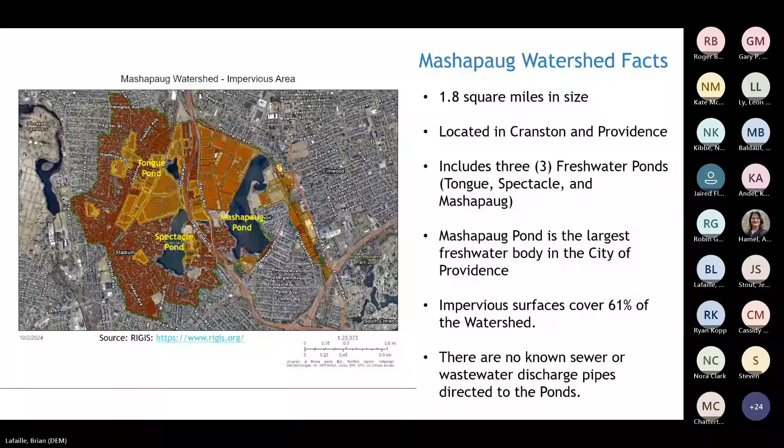So some examples of impervious cover and sort of how it looks within this actual watershed. Here's some photos. We got a Google Map view, aerial view of Mashapaug Pond with Spectacle Pond in the distance in the upper left-hand corner.

You can see there's pretty large commercial properties within the watershed, very large rooftop areas, which are also considered impervious cover, lots of pavement, lots of sidewalks, lots of concrete. And in some cases, we have concrete or pavement going right up to the shore of the ponds. In the lower left-hand corner, you can see asphalt or pavement is running right up to the shoreline.

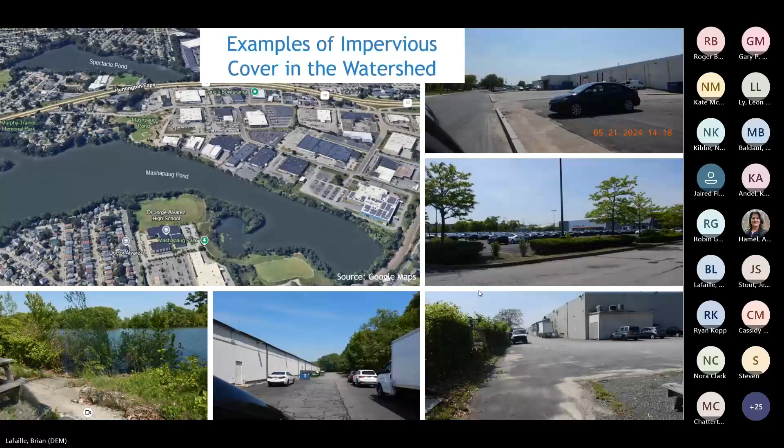So let's talk about why impervious cover is such an issue for water quality, why that over 10% number is a problem. Well, as you can imagine, when we have an area such as the Mashapaug Watershed that has so much pavement and impervious cover, when rainwater lands on those surfaces, that water runs off and becomes stormwater. That water is not just being discharged into our waterways through catch basins and other point sources, but it's also capturing a lot of pollutants as it moves along the ground surface.

The slide that you're seeing in front of you sort of has an overview of the typical stormwater pollutants that can be found in stormwater and their sources. Examples are nutrients such as phosphorus and nitrogen, which come from man-made fertilizers, also animal waste that's in the environment, organic matter from leaf litter. Bacteria can be picked up in stormwater and discharged from animal waste, human waste, organic matter.

And we also have some industrial pollutants such as metals, sediment, oil, and grease that comes from industrial activities, vehicles, rooftops, parking lots, etc. And lastly, the sixth example here is chlorides. Chlorides are applied in the form of road salt and sand during the winter months, and those can be washed off into our water bodies as well.

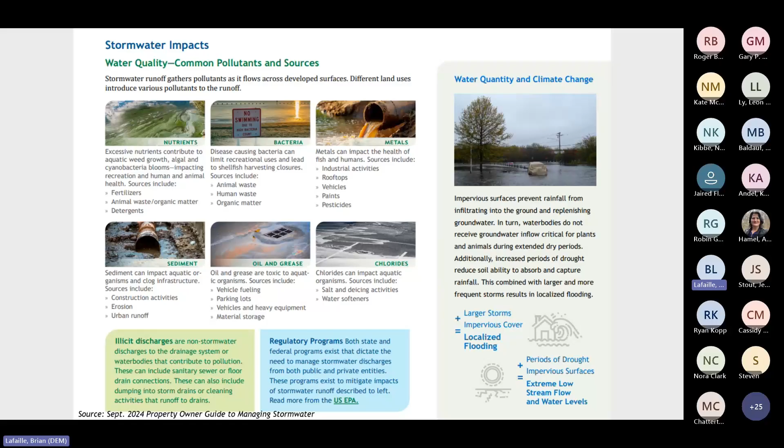So how do we address these pollutant impacts associated with stormwater and impervious cover? Well, the Clean Water Act, which has been around for a little over 50 years now, we celebrated the 50th year anniversary of the Clean Water Act a couple of years ago. That sets up a framework for a water quality-based approach. So DEM is charged with applying this Clean Water Act framework, and we do that through lots of different staff here in the Office of Water Resources.

The first thing we do is we monitor and assess our surface waters. If they're impaired or threatened or not meeting water quality standards, we list them as such. And if there are impairments, we look at figuring out what is causing the impairment and how can we reduce that impairment by reducing the pollutant loads going into these water bodies. We do that through developing what's called the total maximum daily load, or TMDL, and we'll get into that a little bit more in the next slide or two.

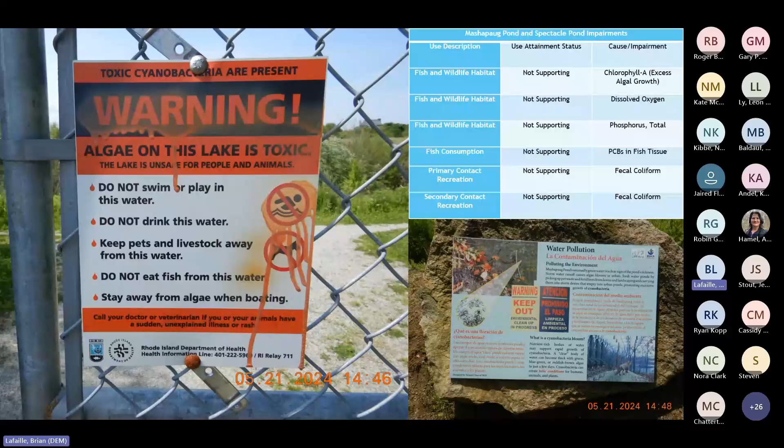So how do we turn this ship around? What is the process for making improvements in the watershed? As I mentioned earlier, we have a process for calculating the maximum amount of a pollutant that the water body can receive in order to meet water quality standards. And that's through the TMDL process. The TMDL also sets limits on how much we can allow into a water body and what maybe needs to be reduced to help that water body achieve the standards that we set out to achieve.

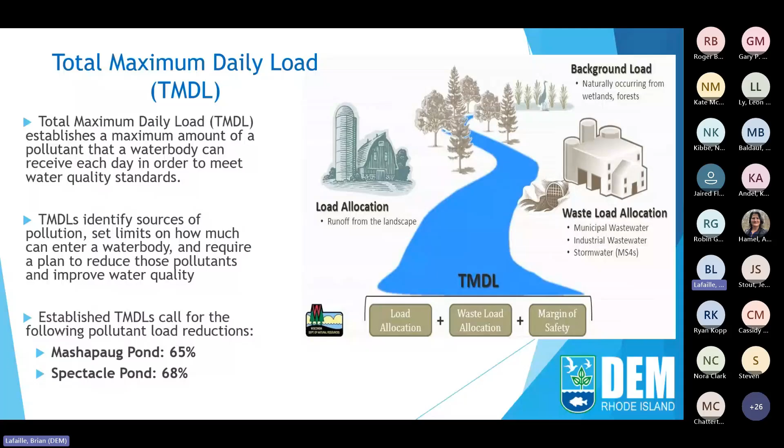Within the watershed, we have established TMDLs currently. For Mashapaug Pond, those TMDLs are asking for a 65% reduction in the pollutant loads in order to bring the water body back into compliance. And for Spectacle Pond, that number is 68% reduction. Okay, so now we've assessed our water bodies, we figured out what reductions we need. How do we control and manage those reductions? Well, we do that through another element of the Clean Water Act, which is a RIPDES permit.

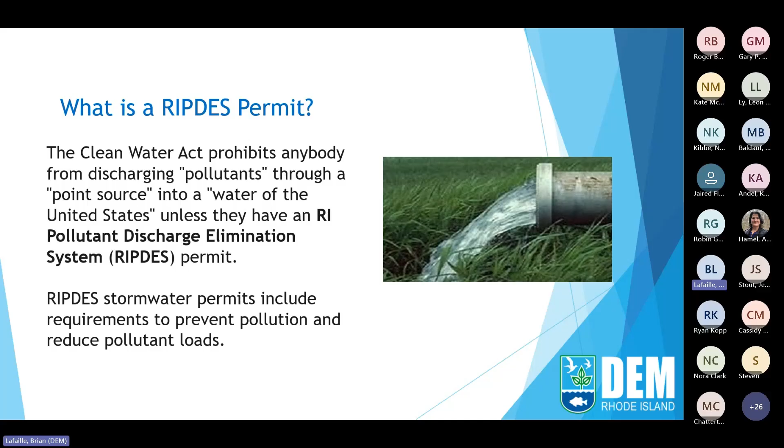So the Clean Water Act prohibits anybody from discharging pollutants through a point source to a water of the United States unless they have a Rhode Island Pollutant Discharge Elimination System permit, otherwise known as a RIPDES permit. Now, RIPDES permits are not just a piece of paper that says you can discharge these pollutants. They're documents that require you to comply with certain requirements to prevent pollution and reduce pollutant loads. Currently, we have 3 different RIPDES Stormwater General Permits in effect in our state. These same types of permits are in effect throughout the nation, so we're not alone in this implementation.

The first permit is our MS4 permit, which stands for Municipal Separate Storm Sewer System General Permit. This permit applies to 34 cities and towns within the state, and it's basically regulating the discharge from the stormwater collection systems in our streets and our roadways. We also have 8 other MS4s that are not cities and towns, but act similarly, such as the Rhode Island Department of Transportation, QDC, Department of Administration, Pastore Complex, among others.

Our second general permit that exists today is our multi-sector industrial stormwater permit. This permit applies to certain industrial sectors, not all industry. Currently, we have 161 sites permitted statewide under this general permit. The last of our 3 existing stormwater general permits is our construction general permit, which applies to construction activity. Basically, if you're disturbing land, we want you to control the discharge of sediment from those sites while they're under construction. And we have approximately 600 sites permitted statewide under that permit.

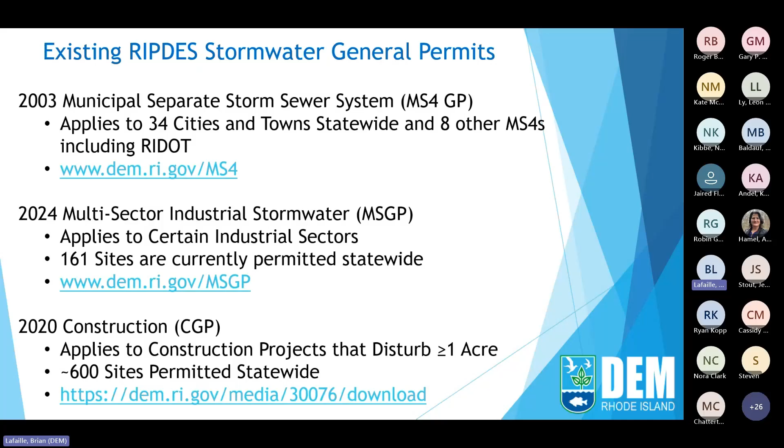Under the Clean Water Act, there is a provision called Residual Designation Authority. This provision allows the DEM to require additional stormwater permits for sources that are not already regulated when we know that stormwater discharges are violating water quality standards, significantly contributing pollutants to surface waters, or are linked to pollutant reductions needed in TMDLs. DEM or a comparable state agency can invoke this authority, or this authority can be requested by petition.

And the reason why we drafted a permit and we're talking about it today is because we received a few different petitions over the last several years. The first petition that we received to invoke this RDA authority within the Mashapaug Watershed was from the Conservation Law Foundation in 2018. And more recently, we received a renewed petition from the Rhode Island Attorney General's office in January of 2024.

The 2024 petition asked us to focus on several main elements in invoking this RDA authority. The petition asked the DEM to close the stormwater permitting gap by addressing the unregulated point source discharges in the Mashapaug Watershed from properties with over 1 acre of impervious cover. It also asked us to address the legacy pollution and water body impairments, which are well known. The petition included a request to promote green infrastructure to reduce flooding and the adverse impacts of more frequent intense storms.

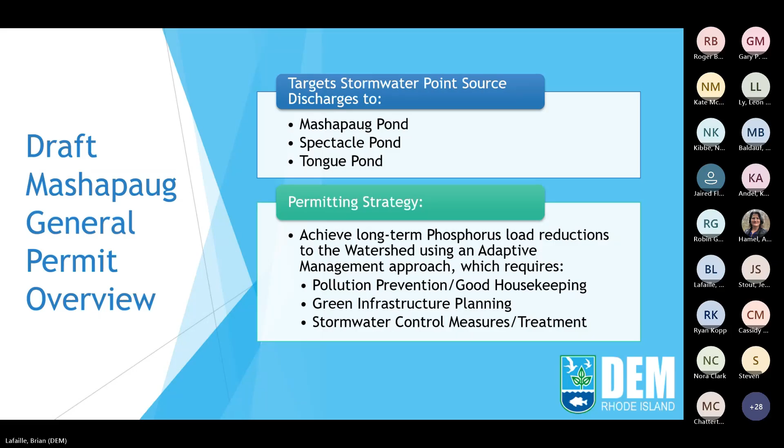Thanks, Brian. I'm going to be presenting an overview of the draft Mashapaug General Permit. As Brian mentioned, this permit is targeting point source discharges of stormwater going to the Mashapaug Pond, Spectacle Pond, Tongue Pond, and any associated wetlands or unnamed streams in that watershed. Our strategy with this permit is to achieve long-term phosphorus load reductions to the watershed using an adaptive management approach. And we'll be requiring levels of pollution prevention, good housekeeping, green infrastructure planning, stormwater control measures, and/or treatment. Next slide, please.

So what do I mean by adaptive management? Adaptive management is a long-term flexible approach that allows for adjustments over time. It focuses on continuous improvement. So you have to remember that it took a long time for the water bodies in this watershed to become polluted, and it's going to take a long time for them to get cleaned up again to the levels that we want to see. So the adaptive management approach allows us to roll out requirements in a phased manner. So that means we're rolling out stormwater requirements in steps, not all at once. And this will allow property owners to make incremental improvements over time. And it also allows us to prioritize sites with the most impervious cover first in this first permit term. You can go ahead to the next slide, please. Thank you.

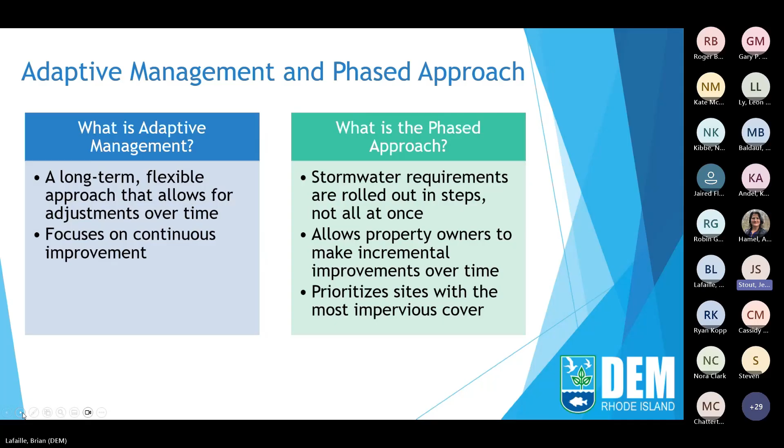So this image here is an image from our GIS map, which is available on our website that's shown on the slide. Also on this website, if you haven't viewed it already, there's a lot of information that we're talking about today. There's this interactive GIS map that I just mentioned. There's also a copy of the draft permit, all the appendices that go with the draft permit, and the draft regulatory fact sheet that goes with the permit. So if you haven't checked it out, you can view it on this website. Getting back to the interactive GIS map, that is something that the public can look at. It's open to everybody who visits our website. You can click on any of these parcels and find out who the property owner is, the total area of the parcel, and the amount of impervious cover associated with that parcel.

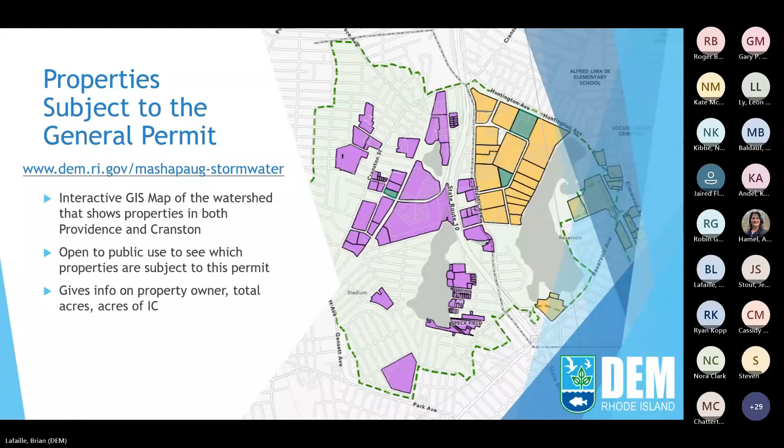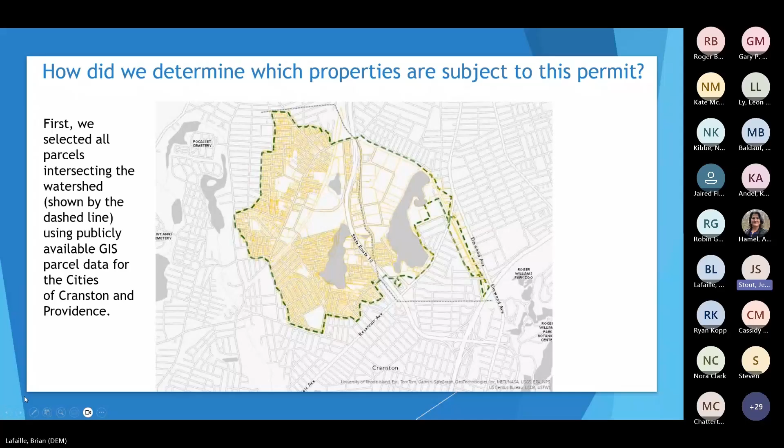Then we looked at all the parcels and who owned them, and we figured out if there were multiple parcels that were contiguous or adjacent to each other that were owned by the same person. We merged them together into one parcel for the purposes of permitting in this watershed. Then we calculated the amount of impervious cover for each parcel, whether it was merged or unmerged, and we selected all of the parcels that had at least 1 acre or more of impervious cover.

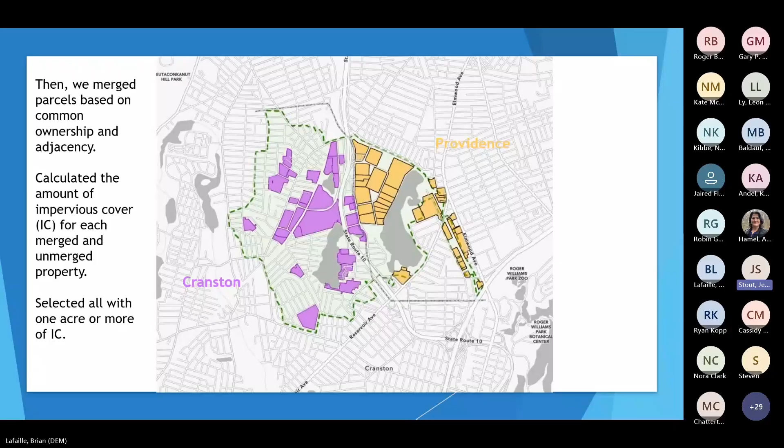Uh-oh, we're stuck. Okay.

Thank you. So the same properties that are in that map are also listed here on this table. We've got about 64 properties total, 3 of which are subject to the multi-sector general permit for industrial stormwater. So they are exempt from the Mashapaug General Permit because we don't need to regulate those parcels twice.

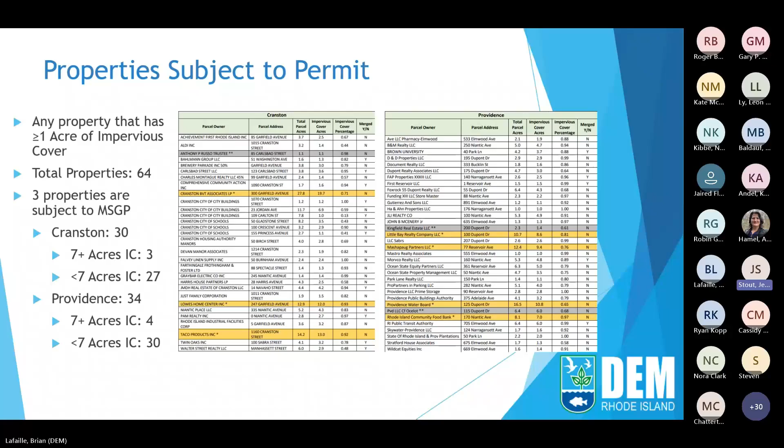I also want to point out that this table can be found on our website. There's an Excel version of this table on our website right underneath, I think, the interactive GIS map. And then it's also at the end of the regulatory fact sheet that is also available on the website. Next slide, please.

So I'm going to talk now about the requirements, the permit conditions for all properties. So all the properties that have 1 acre or more of impervious cover. So for all the properties, we're going to ask that you minimize exposure of pollutants to stormwater. So that might mean that if you have any materials that you store outside, that you cover them or bring them indoors. It means making sure that if you've got a dumpster, it's covered, and that where it's located isn't somewhere where the leachate is able to go directly into a catch basin.

We're asking that you might want to minimize the salt, sand, and de-icers that are used on your property during the winter months, limit the amount of fertilizer and pesticide use, make sure that you're cleaning up your organic waste appropriately, etc. So those are different strategies and ways to minimize the exposure of the pollutants to stormwater and precipitation.

Next, we're going to be asking for a good housekeeping program to be implemented. That will, at a minimum, consist of catch basin cleaning, if you have any catch basins on your site, and street sweeping for any paved surfaces on your site twice a year. We're asking that those things happen in mid-November to mid-December, which is after leaf fall, so that you can collect the leaf litter that's fallen. Studies have shown that leaf litter contributes to nutrient loads, which, as Brian already mentioned, can cause toxic algal blooms.

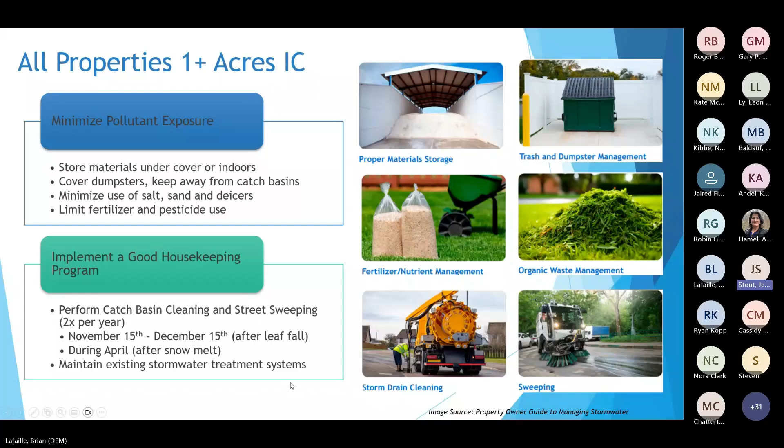We'll also be asking all the property owners to try to minimize the impacts from major storm events. So as Brian mentioned, we've certainly seen our share of increased storm events, more intense storm events, and we all kind of just need to be a little bit more prepared for those things. So especially if you're near a water body and you're near a flood level, we would suggest that you try to store any outside materials above flood levels, or if you know a storm is coming, maybe temporarily move them indoors so that they're not subject to the storm or to flooding if possible.

And there's a couple other strategies that are in the permit, but just taking a look at your site and trying to find ways to make it a little bit more resilient to the impact of major storm events.

We're also asking for properties to have a spill prevention, control, and response plan, and make sure that you have staff that are trained to use things like that, so that you can quickly clean up a spill should it happen. Try to prevent it from reaching a water body or into a catch basin. We want to try to clean that up as soon as possible, and then also having plans and procedures in place to notify the proper authorities should there be a spill at your site.

We're also asking property owners to implement erosion and sediment control practices, making sure that you stabilize any exposed erodible soils, or if you've got sediments that are moving across your site, try to contain them, prevent them from moving into catch basins, prevent them from going into the water bodies using erosion and sediment control practices. Next slide, please.

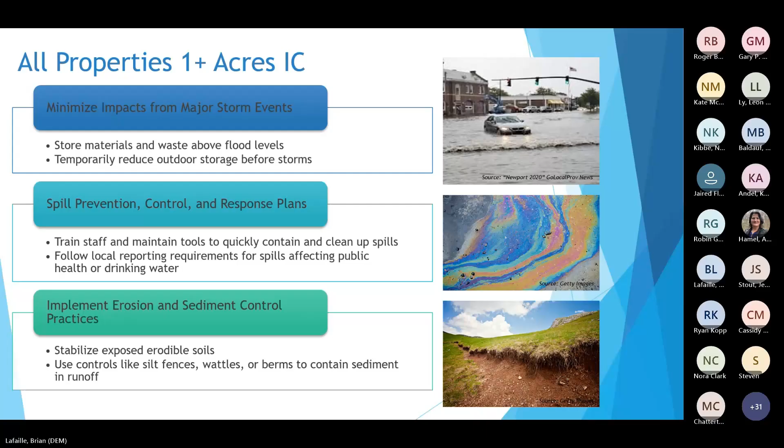So now I'm going to move on to the additional requirements that only affect the properties that have 7 or more acres of impervious cover. Okay, so one of the things that the parcels that have the most amount of impervious cover are going to be required to do is to develop a written stormwater management plan, or what we call a SWMP. What is a stormwater management plan? It's a site-specific document that identifies pollution sources and outlines how stormwater will be managed on the property to protect water quality.

So what should be included in a SWMP? Basically, there's a few things. First thing is you want to identify and name a pollution prevention team. So it's anybody who's associated with your site who is going to be responsible for implementing the stormwater control measures, whether it's catch basin cleaning, sweeping, making sure that these things get done. So you want to make sure that your SWMP actually names those people.

The next thing we're asking for is a site description and a map that's showing the land use of your property, any drainage patterns, impervious areas, stormwater features that are existing on your site, whether that's a catch basin or a pipe or an outlet, outfall, or maybe it's an actual stormwater control unit, whether it's underground or above ground, whatever it is, put it on the map, put it in the SWMP.

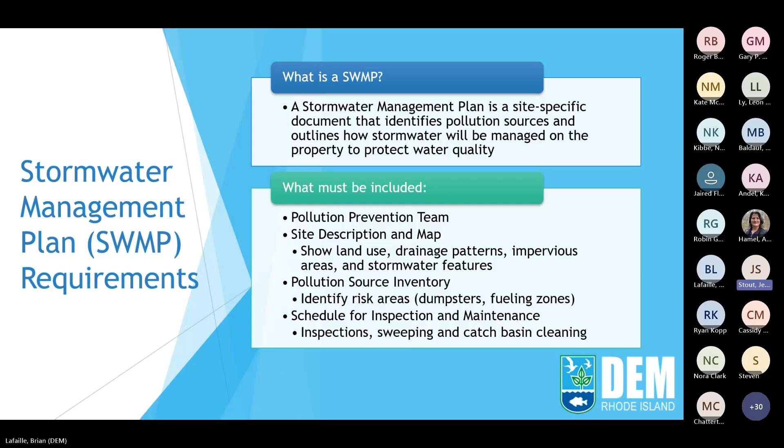Thank you. So I pointed out that we are focusing on phosphorus in this permit. And why are we focusing on phosphorus reduction? Well, one, as Brian pointed out already, phosphorus is a key pollutant in this watershed. It leads to excess algal growth, low dissolved oxygen, harms aquatic life, and obviously it limits the use of the ponds recreationally.

But it's also been shown to be an indicator parameter. We can use it to establish load reduction targets and treatment credits, but it's also understood that if you're reducing the amount of phosphorus going into the water bodies, you will also be reducing other pollutants such as fecal coliform, suspended solids, organic matter. Generally speaking, it's sort of acting like that indicator.

We've got the TMDL documents that have already established phosphorus load reduction targets. As Brian mentioned earlier, Mashapaug Pond reduction is 65%, Spectacle Pond is 68%, and Tongue Pond, though it's actually unassessed at the moment and doesn't have its own individual TMDL, it feeds into Spectacle Pond, so we applied the same pollution reduction for Tongue Pond at 68%.

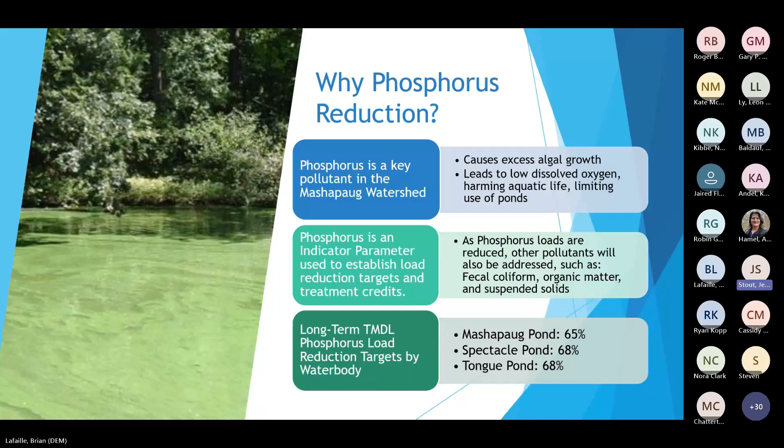So next, I'm going to talk about the other things. So how do we make sure that we're reducing the phosphorus to the adequate amount? Another thing that the 7+ acre impervious cover sites are going to be required to do is develop a written stormwater control plan, or an SCP. What's a stormwater control plan? It's a written document that explains how the property will meet its phosphorus pollutant load reduction target using approved structural and non-structural control measures.

Basically, it's a document where you're going to look at your site and say, these are the things that we have existing on our site that we can use to reduce phosphorus. We might need to propose a stormwater retrofit BMP, or we may need to propose a new stormwater control, whether it's structural or non-structural.

And this document will help the permittee and us figure out, all right, by the end of this first permit term, you're going to need to show us that you are reducing your phosphorus load by 30% of your responsible target. It will also have calculations showing the amount of treatment credits for existing and proposed stormwater controls, and there are methodologies for estimating pollution reduction credits that are available in the appendices of the permit. Again, that's on our website, so if you want to take a look at that, it's already available for you to view. The SCP will also need to have a schedule for implementation and installation of proposed treatment.

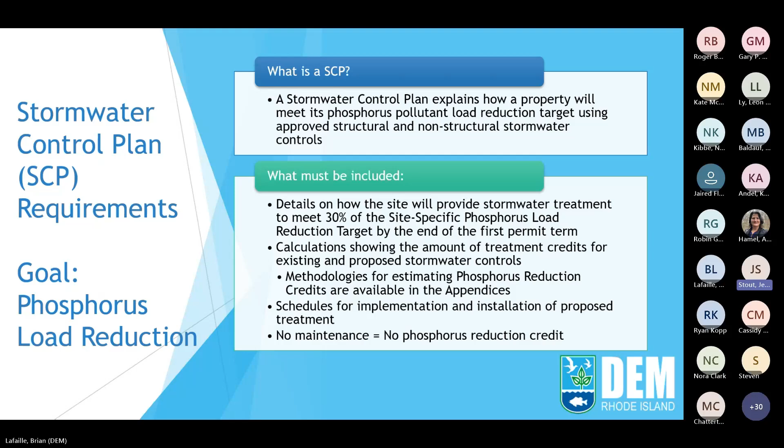So next I'm going to talk about the rest of the properties that have at least 1 acre of impervious cover, but less than 7 acres of impervious cover. For these properties, we're asking property owners to evaluate your site for opportunities to do some sort of phosphorus reduction, whether that includes reducing or eliminating impervious surfaces. Perhaps you've got extra impervious surface, or additional parking that you don't need. Maybe you consider actually removing that pavement.

Maybe you improve stormwater infiltration on your site somehow, whether that's with underground units, or maybe it's just trying to direct runoff to pervious areas so that it can seep back into the ground. If you're right near the water bodies, maybe reestablishing or enhancing aquatic buffers, making sure that there's vegetation, especially if you're one of the properties that has pavement right up to the water's edge. You consider pulling that back, trying to put some plants there, enhance the aquatic buffer. That will help. Or you could also look for opportunities to install green infrastructure or stormwater retrofits on your property.

So we're asking you to do this evaluation and then report on it in your annual report, because this permit does require an annual report. And we're just asking you to continually evaluate opportunities every year. And you might end up deciding to actually implement some of those, especially if you have a capital project coming up. You want to make sure that it's including stormwater control in a capital project that you've got coming up. So I think that's all I had to say on that one.

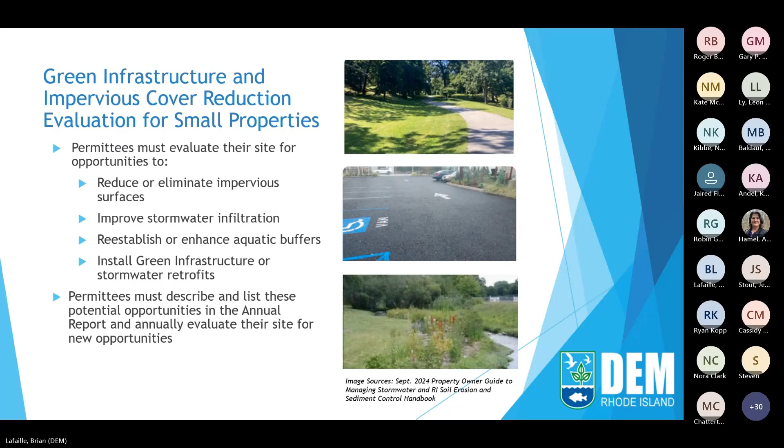Yes. So I mentioned green infrastructure. What is green infrastructure? It's a design strategy that uses natural processes to manage and treat stormwater at its source, rather than piping it away and discharging it directly to surface waters without treatment. So these tend to be smaller. There tend to be more of them, as opposed to a very large detention basin somewhere. Especially in a very urban area, there's not going to be a lot of area for large things. So it's a better idea to think about smaller controls, smaller treatment options, and green infrastructure is a good example of that.

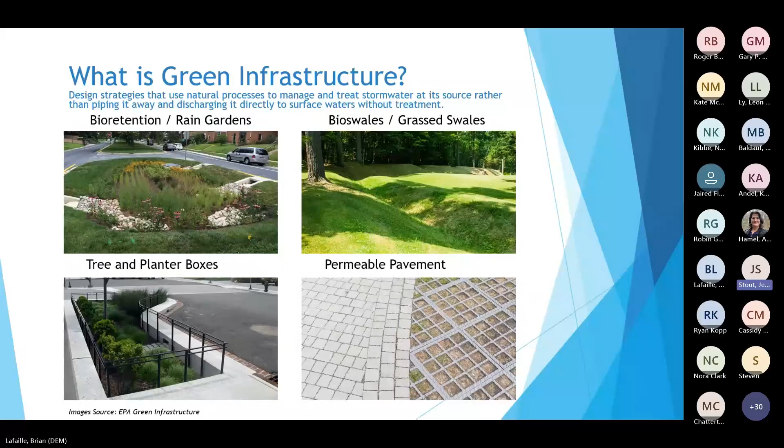So we've got different ideas: bioretention units or rain gardens. There could be bioswales or grass swales. You might do a tree filter or a planter box with a curb cut. Maybe you do permeable pavement. Perhaps you've got an area of pavement that doesn't get used much, and maybe you want to make that permeable instead. I think the next slide also has additional examples. There could be rainwater harvesting with either a cistern or a rain barrel coming off your roof. You could consider green parking.

You could consider planting trees. Urban trees are great. Not only do they beautify, but they also help reduce the heat island effect, and they help air quality as well as water quality. And then lastly, downspout disconnection. So if your downspout right now is just flowing over your parking lot, maybe you direct it to a pervious area, or maybe you develop a rain garden and let your downspouts water it that way. So these are all just ideas. There's additional guidance on our website to give you additional ideas.

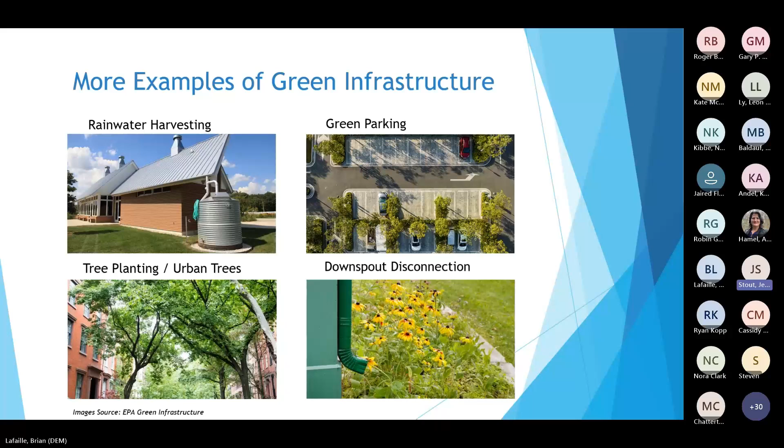And with that, I'm going to turn it over to Leon Ly, and he is going to talk about the permit issuance process. Thank you, Jen. Yeah, so we'll be going over the permit issuance process. Currently we're in the informal process right now. So this is the public workshop, which is today and tomorrow.

This workshop is really just for permittees and stakeholders to learn about the permit and give us any comments or feedback before the public notice, which is the formal process where we will be receiving comments. The public notice will most likely be around either August or September, so just keep an eye out on that.

So after the public notice, we're going to be issuing the final permit. Before we issue the final permit, we're going to be reviewing all the comments from the formal comment period, and once we establish that, we'll be giving out the effective date and the application deadlines for that also. Go to the next slide.

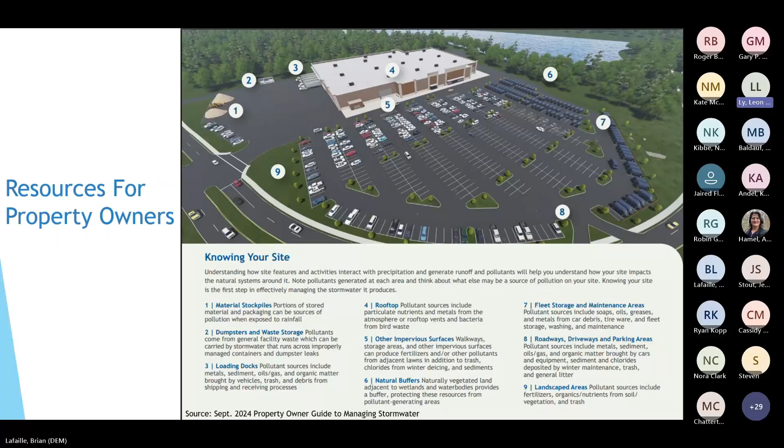This is also in the same guide and talks about how you can identify the stormwater on your site and how you can make improvements. It goes hand in hand with the slide above on how to evaluate, and from there it shows you where the stormwater actually goes and how you can treat it properly.

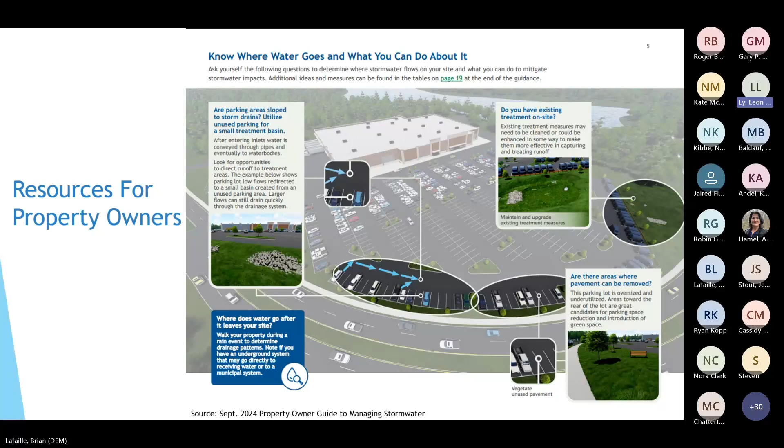So we have a few more guides. These are more for professionals to use. We have the Stormwater Retrofit Manual for BMPs and stormwater control measures. We also have the Rhode Island Stormwater Design and Installation Standards Manual, also for BMPs and stormwater control measures. We have the BMP Accounting, Tracking, and Reporting Tool, the BATT tool for EPA Region 1, used to calculate pollutant reduction credits. We also have the Rhode Island Low Impact Development Site Planning and Design Guidance Manual.

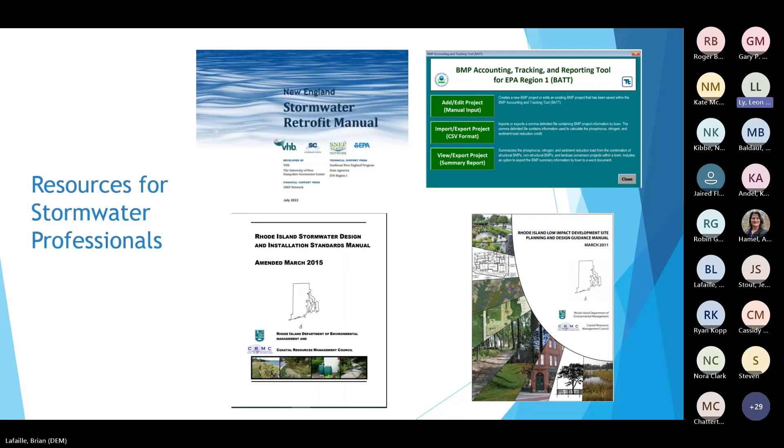So how can the community help? If you visit the website rhodeislandstormwatersolutions.org, we have a lot of helpful tools on how to improve the water quality in your watershed, simply by picking up after your pets, not overusing fertilizer, using your water wisely, and even trying to recycle rainwater. By doing all those things, we can keep everything out of the storm drains. Storm drains connect and drain directly into water bodies, so we should avoid dumping anything directly into the storm drain.

Next slide. So a few next steps that you guys can take. So if you guys want to stay connected, we have on our website an email list that you can sign up to stay connected. Everyone should be able to sign up. By signing up, you get a lot of important updates on the permit and any upcoming events, including the public notice when that's out. Also on the website, we're going to be posting all of our material. So this presentation, and then we're going to be posting the recording of this presentation along with the Spanish version of the slides if anyone needs that.